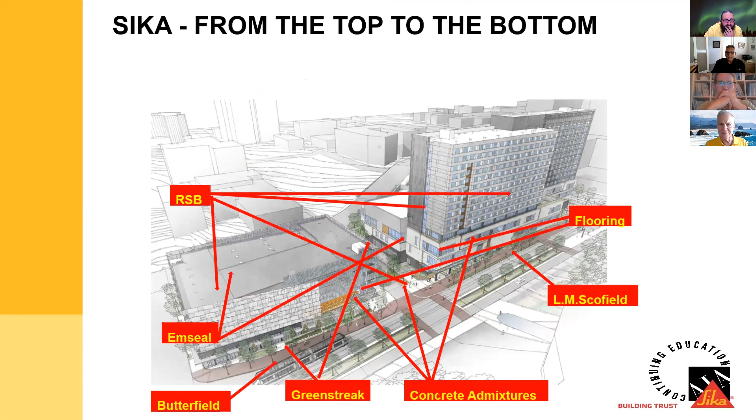In my 5 minutes, I want to give a brief introduction of Sika. We're going to talk about all the different divisions and how to find the correct local rep, introduce you to our Pacific Northwest reps for my district. I want to highlight quickly 4 products and then talk about the Sika Knowledge Center and some continuing education credits. So what do you know about Sika? Most people say our sealants, some people say our repair mortars, but I'm going to go through this very fast - these are just the companies we have in our construction division. RSB is the division I work for.

RSB is the commercial refurbishment, sealing, and bonding division. We have your structural strengthening FRP products, your deck coatings, your sealants, your repair mortars, your modified mortars, polymer modified, and products of that nature.

Locally here in my district, it's Oregon, Washington, Idaho, and Alaska. I have Serge Alexander living in Portland, and you can see his information on the board. He takes care of Oregon and Idaho. In Washington and Alaska, we have Jeff Delplain and Steve Negahbani. Steve is our newest member. He's been with us about a year, a little over a year, and I'm running around trying to make heads or tails of what everybody's doing.

Let's talk a little bit about Sika before we jump into all the products, including 4 new products I want to highlight. If you don't know Sika, we are over 100 years old. We operate in over 100 countries. The RSB division, my division, one of the nice things is where Sika operates in a country, they try to manufacture in that country. At least 99.5% of the products we sell in commercial RSB in the United States are manufactured in Southern California, Northern California, Texas, Ohio, and New Jersey. Sika is an $8 billion company plus, and we have over 26,000 employees worldwide.

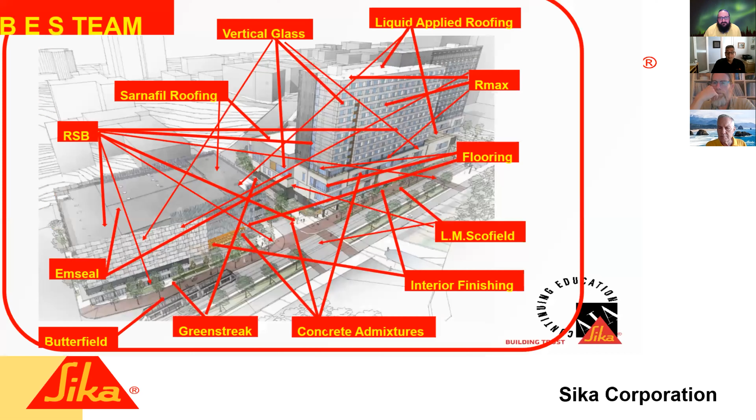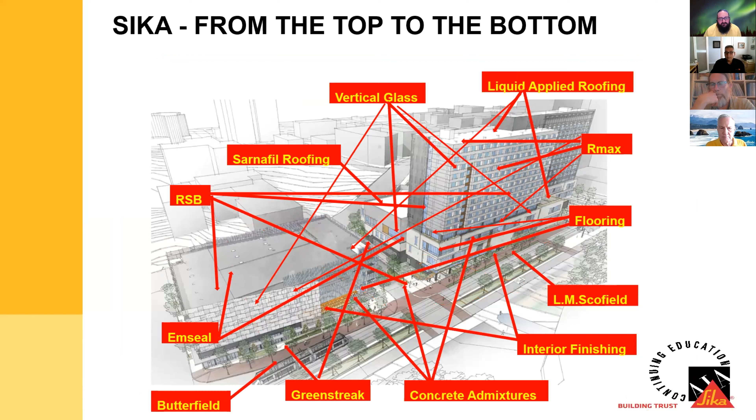Many folks call me and say, you're Sika, I want Sarnafil roofing, which is fine. If you are not sure who your rep is or what division they belong to, feel free to call any one of us and we'll be happy to direct you to the right person if we can't ourselves.

So let's highlight 4 new products. Most of you are familiar with deck coating products and the textured deck coating products. From that technology, we have come up with One Shot. We still have our single component urethane deck coating systems for pedestrian, single component for vehicular, multi-component for pedestrian or vehicular, and our hybrid systems. The hybrid systems would have your urethane base, an epoxy intermediate coat, and then urethane or two urethane top coats.

What we did is we took that technology - when you do the multi-systems, you have to make sure you prime, then the base coat, then the intermediate coat, the top coats, and they all have wait times in between. With this new one-shot technology, everything is mixed in one pail, then it's spread out with a squeegee, back rolled north, south, east, west. You walk away, it's done. You have your base, your top coat, your wear surface, everything.

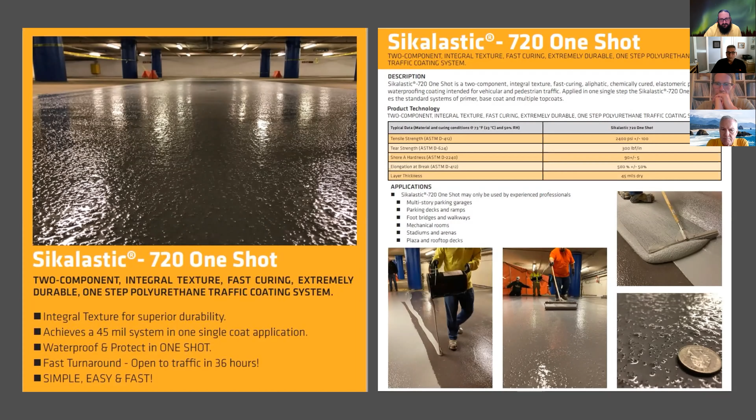The 720 One Shot is for vehicular traffic. The 726 balcony is for pedestrian. The 726 balcony you can actually walk on within 8 hours.

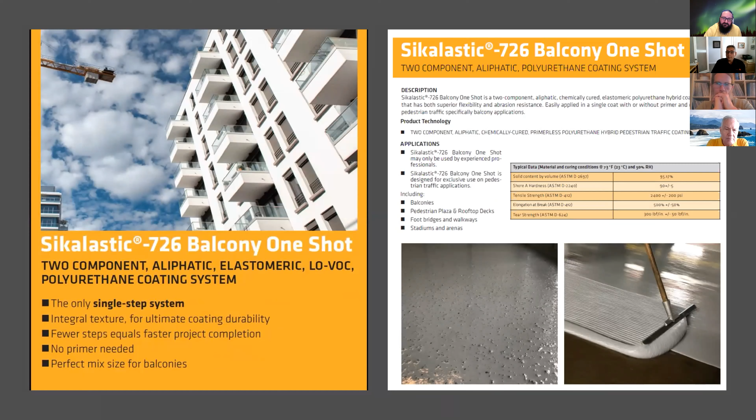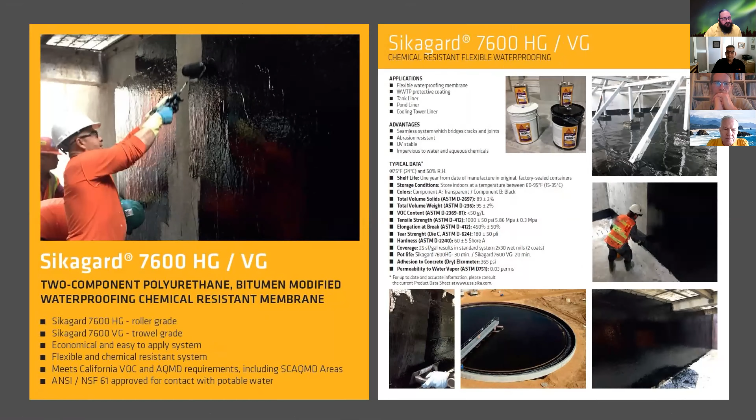The 7600 is our 2-component polyurethane bitumen modified waterproofing membrane. This is great for tank liners, pond liners, cooling towers. Our 360 SCC is our self-consolidating concrete mix. A lot of you know our Sikacrete 211 SCC, a fabulous product - we still sell it, make it. The 360 is new to this year, and it's great because in one lift, you can go to 24 inches, which is pretty amazing.

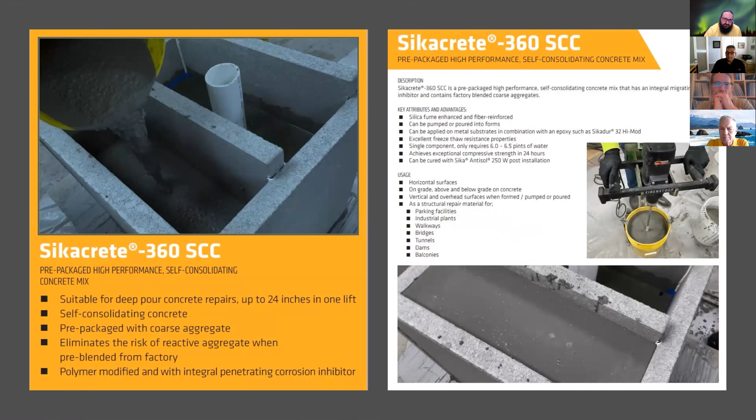That is something you can do at your own pace - you can start a tutorial, leave it, and come back. As I said, it's very hard for me - I say I just busted 5 minutes, so I'll turn it back over to Nate.

Thanks, Frank. Much appreciated. If I can figure out how to turn it back over to Nate. All right, I got it. Okay, thanks. Phil, I saw you were online. Do you want to introduce yourself briefly?

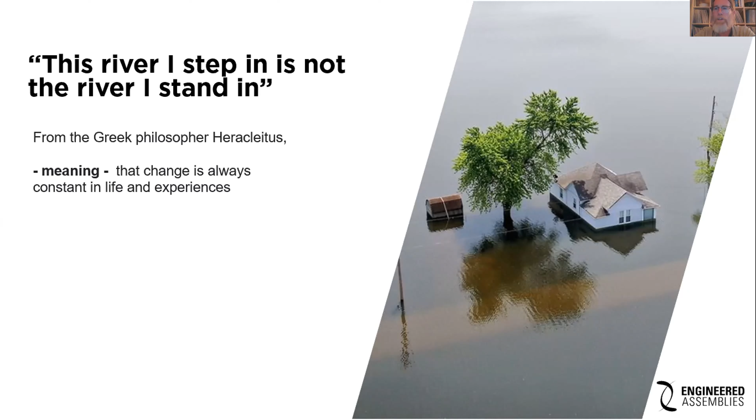They're protecting the building to a great degree, especially when we consider outboard insulated systems are becoming more and more prevalent. So they have a big responsibility, and it's up to us to make sure these things are engineered, designed, and installed correctly. So we've got some weight on our shoulders here.

Ultimately we're going to have to do it with intelligence, because we're not building walls or facades or envelopes out of one yard thick natural stone or two feet thick natural stone anymore. We're in this point of transitioning into lighter weight systems, less mass, less embodied energy. We have to compensate with better engineering, better design.

And these systems we're moving to have incredible potential. They're already delivering, but they could even deliver more. Just like the cars of old, we've got newer vehicles which weigh less, and we've compensated with the brawn of yesteryear with things like crumple zones and airbags. We've made the vehicles resilient through better engineering, better design.

That's no different than facade systems, because ultimately the forces pushing and pulling against facade systems, we're not going to beat them with muscle. We don't beat Mother Nature that way. We have to be involved in a dance of give and take, push and pull. We can do that with clever engineering, good design, and good installation, and come up with a system that can flex when it needs to flex, and not break in the face of environmental adversity, what have you.

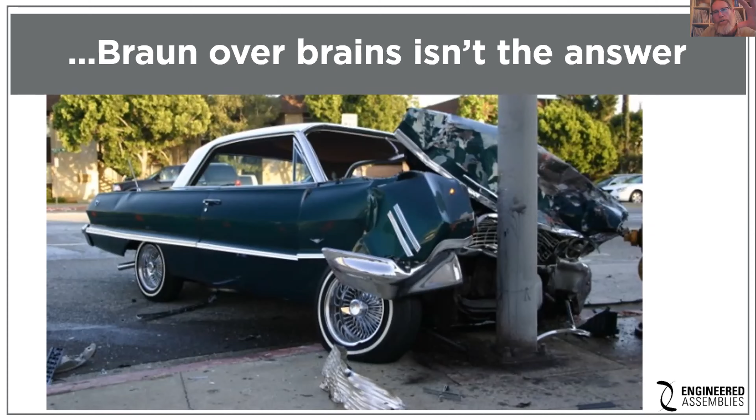So I think this is something to take into consideration. It's important to note that, as I suggested, the environment right now is a substantial dictator. We're designing our facades around materials that are trying to be sensitive to the environment. We also have to be respectful of the environment from a climatic standpoint. So we're using materials with less embodied energy.

Now that's a two-part component. There's initial and recurring embodied energy. Initial, of course, being the energy involved in the fabrication of a material and locating it to site. But then recurring embodied energy is the energy it takes to manage a material, maintain it, and potentially replace it if it doesn't meet expectations in terms of lifespan, longevity.

Well, so that's a challenge, because in many respects, when we're building something lightweight and low mass, the immediate thought is that it's not going to be tough enough, but that's not actually the case. It doesn't have to be that way.

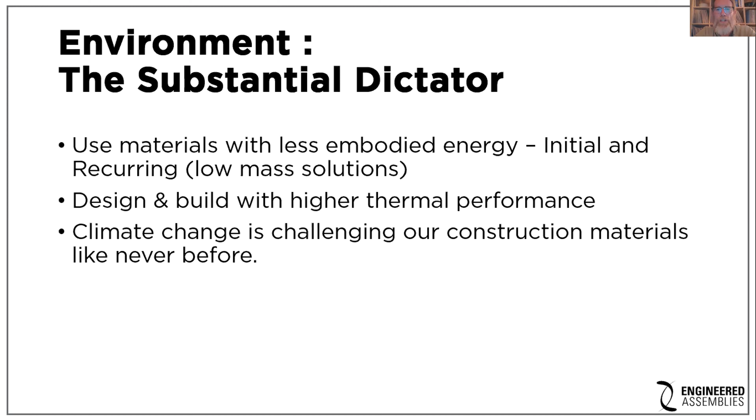We're also having to build with higher thermal performance. And as we've suggested, climate change is challenging our construction materials like never before. But this isn't a restriction. These are only some factors we have to consider to help us navigate our direction as we head toward building good facades for the future.

So within this low embodied energy, we've got the potential of using materials like fiber reinforced cement, high density systems, phenolics, ceramics, porcelains, certain metals, but also we have to consider the systems supporting those, because there's a synergy there. They work hand in hand. The substructure supporting them may be just as important as the materials on the face, the skin. So that all has to be considered, and how those are detailed and installed is critical.

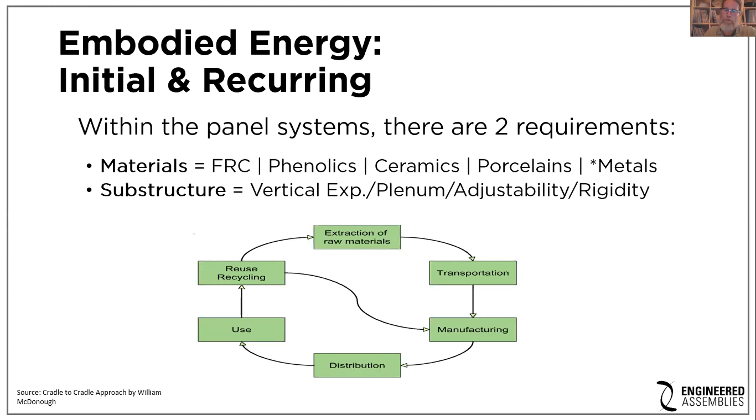So as I say, not limiting, we can use some of these materials to embrace the contemporary design ideals that we have today. And there can be a use of these materials, of course, to address historical content, but also do the cutting edge things, the gritty and daring architecture and construction that we want to do to address our contemporary times.

And so we've got materials designed to take us into the new era that we've been in for a bit and are moving further into. But it can't be done carelessly.

So enter today's subject: 5 most common mistakes. These are not all of the mistakes, but they're the common ones. It's not meant to be finger pointing or a negative presentation, but rather meant to highlight some of the realities that we need to address, some of the things that we can't ignore.

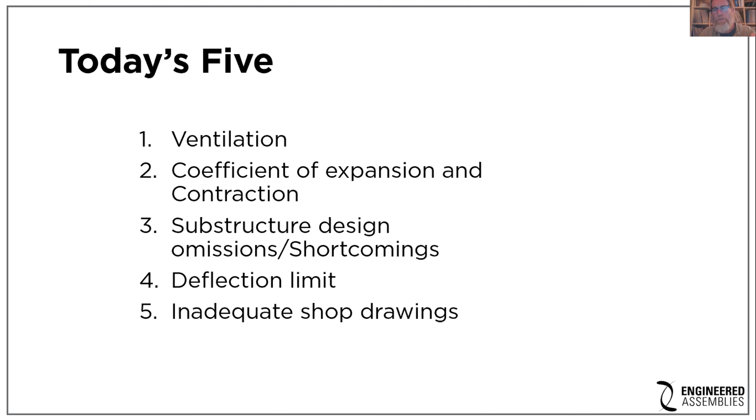And these apply equally from an installation standpoint as from a design or engineering standpoint. So we're going to look at ventilation, coefficient of expansion, contraction, substructure, design omissions, shortcomings, deflection limits, and shop drawings as part of lightweight facade systems. Most specifically, we're looking at Rainscreen systems for all intents and purposes.

A lot of this material is covered in the Engineered Assemblies design guide in terms of proper direction and detailing. This design guide is available for free download off our website. The beautiful thing about it, besides being an incredibly complete, comprehensive guide to detailing outboard insulated, thermally broken Rainscreen systems, is that it's not applicable merely to Engineered Assemblies materials. It's applicable to so many materials in the market, and many of our competitors will refer to our guide as it addresses the science of these systems.

A myriad of materials can fit within this, so I invite you to download a copy. You can always request a hard copy from us too. I prefer those, they're easy to flip through and carry around. With that in mind, I'll be referring to it a couple of times within this presentation, so I invite you to get yourself a copy.

So what type of Rainscreen facade system are we really talking about here? Because when people mention the word Rainscreen, there's probably as many definitions for it as there are for the term free range chicken. So there are a lot of different designs. The version I'll be referring to in this presentation is something we call an RVRS System 2.

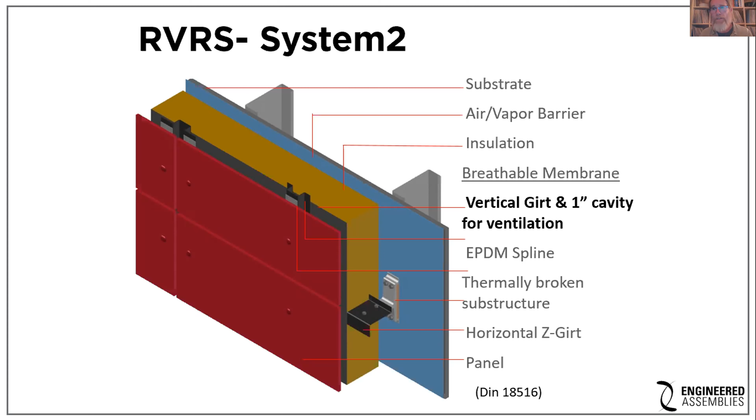Okay, and then behind that, of course, we've got our insulation plane, which sits, as you can see, on a thermally broken substructure. So thermally broken substructure, outboard insulated. We've got a membrane to protect the insulation, something to deflect direct precipitation to flow downwards. But we've got a vertical unobstructed plenum, and then we've got a panel in front of that. This is an RVRS System 2, okay? This is what we consider a very good high performance, relevant Rainscreen system for today.

But ventilation - I don't know if you can have too much ventilation within a facade system, within an envelope on a facade. Because certainly, as you probably experience in the Northwest, precipitation, moisture can be abundant, and you need to find a way to manage that. We get our share of moisture in the east, certainly on the east coast of Canada, but wherever you are, there's going to be a necessity for ventilation because it's not just managing moisture.

So we've got an uninterrupted vertical plenum. It's open at the bottom, in this particular case, and these things vary per region from a code standpoint. We can go 6 stories in Ontario with an uninterrupted plenum, okay? In some regions, because that plenum could be treated as a fire chase, you'll need to have a through wall flashing. But for the sake of this particular slide, we were going 6 stories. It's open at the bottom, it's open at the top. Air comes in at the bottom, goes up, comes out the top and exhausts. We've got this continuous flow, okay?

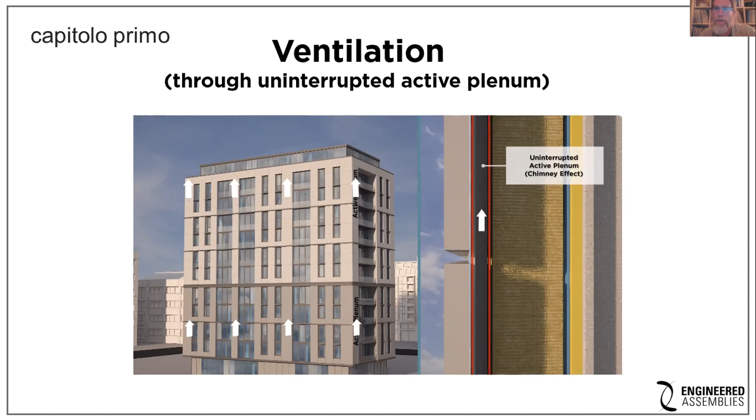Okay, it's constantly working, always working. So this is an important component, and this must be addressed from a detail standpoint, designed correctly, and it has to be installed correctly. It can't be interrupted. There's a microclimate in this plenum, and this plenum, I should suggest, is 1 inch deep. I should have mentioned that earlier, I apologize. It's a 1 inch deep plenum. So the climate in this little plenum is not the climate on the outboard side of the panel. It's not the climate on the inboard side where the insulation is. It's its own separate little microclimate.

Okay, and it does help to defer - if there's an abundant amount of solar heat gain coming down on the panel, it will exhaust some of that heat and relieve the panel of that strain, from that heat energy. There are very few materials that benefit from excessive heat. And so it's going to help defer some of that and exhaust that heat.

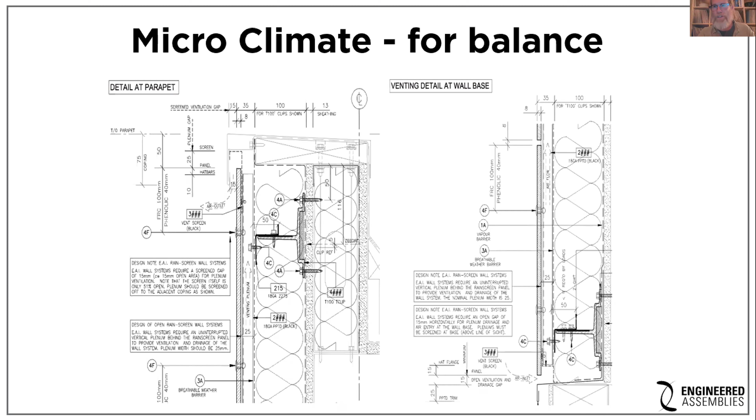Ventilation, a big component of DIN standard 18516, and a big component of Engineered Assemblies RVRS System 2.

Some common mistakes: flashings sometimes get installed on a parapet by the roofing trade, which isn't doing the facade and isn't sensitive to the detailing. In this particular application, this is a louver assembly for ventilation into a building, or it could be a window.

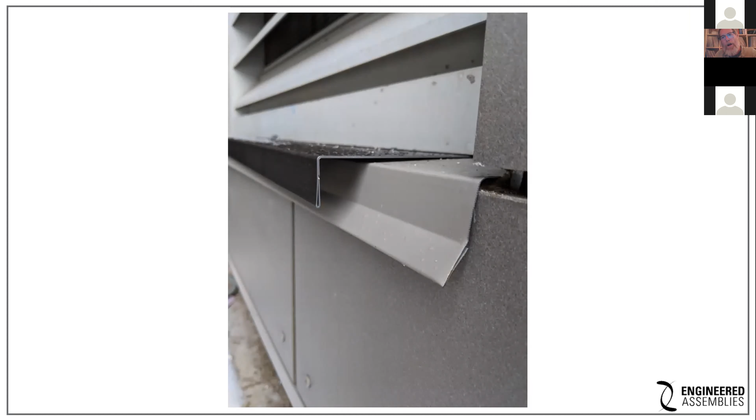We have to ensure these flashings are set up so that this plenum can exhaust correctly, and perhaps on the bottom that it can serve as a proper intake for ventilation.

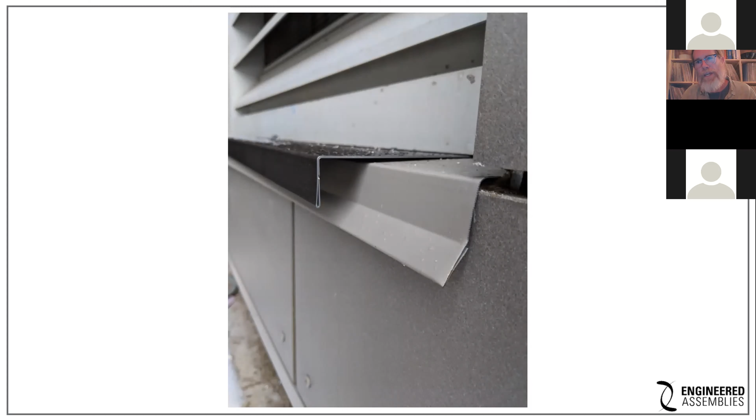All these details and dimensions are laid out in the Engineered Assemblies design guide, in metrics, showing how many millimeters of space should be allowed for proper ventilation. It's all set up for a 1 inch plenum, a 1 inch cavity, which is an adequate amount of ventilation for most materials.

So this thing is open at the bottom and the top for air, but we generally engage 50% perforated screens, and that eliminates critters from making a home within our plenum.

Birds and bats are the primary concern. Most insects aren't that interested in being in a plenum because of its active nature, it's straight up, not good for mating. Wasps in particular aren't interested in being in a plenum either, since the gusts of air moving through are not conducive to their lifestyle.

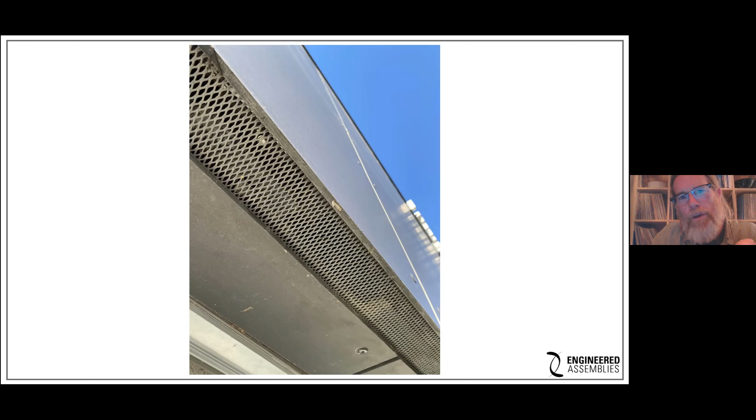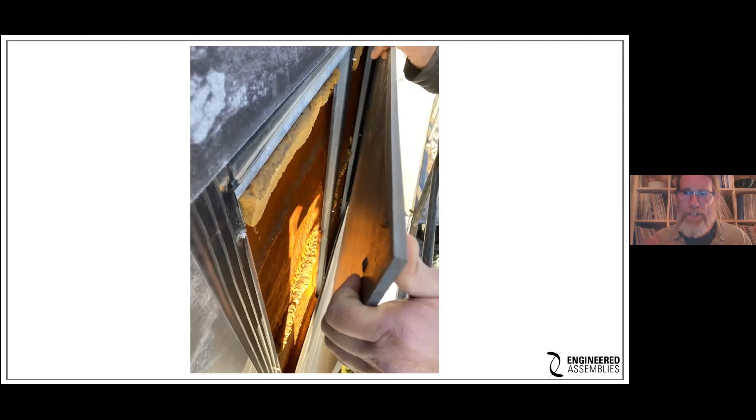This is the kind of stuff we're talking about. But when we look at installations where spray foam is engaged, and the installers didn't respect the limits of the spray foam, it ends up expanding and blocking off the plenum. Then we have a problem: we don't get proper ventilation, it can affect the panel negatively, and it can affect the breathability of the insulation cavity. Everything suffers because moisture is allowed to collect.

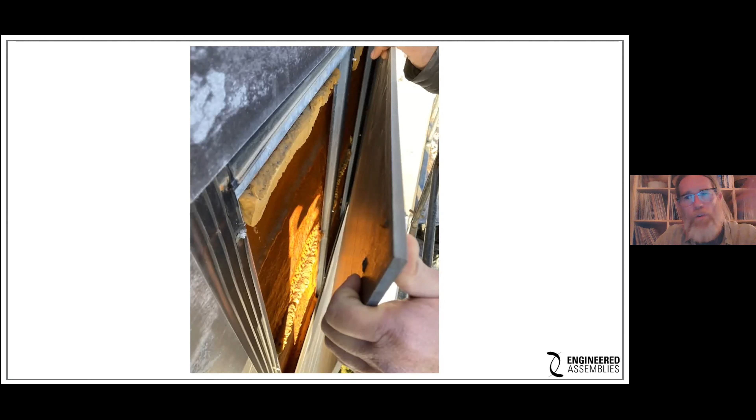These are issues associated with ventilation. We talked about the benefits of ventilation and how it works for the integrity of the panel, the insulation component, and offering a balance in terms of temperature deltas. There's a necessary amount of energy that should be employed to make sure this is managed correctly.

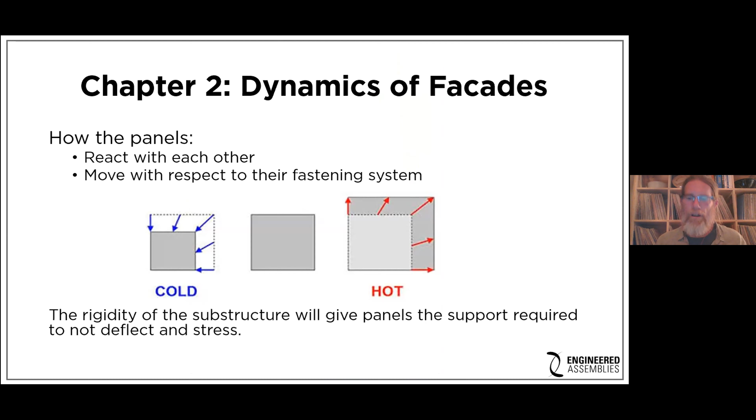Chapter 2: dynamics of facades, how panels react with one another and their fastening system, hot and cold, expansion and contraction of materials. This is an important component.

Oftentimes when we see failures of facade skin systems, whether warping of panels, tacoing of panels, cracking of panels, or shearing of fasteners, it's because allowances for expansion and contraction were not managed properly. Particularly with lightweight rear ventilated Rainscreen systems, lightweight, low mass materials are typically more prone to expansion and contraction than high weight, high mass materials. So we have to address that.

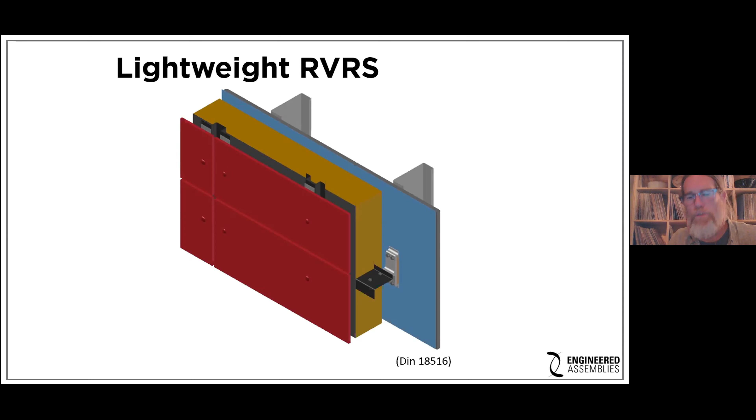It doesn't make them more difficult. We have the intelligence to work around this kind of stuff, and we've been doing it for a while now. We just need to make sure we're paying attention to these types of realities.

For example, when panels, let's take reinforced high density fiber cement, you're going to have a face fasten system, using a rivet system to fasten those panels. Well, all the holes on a panel for all the fasteners need to be over drilled. There needs to be float. We'll refer to them as stop and go points. There's going to be 1 or 2 fasteners on a given panel, let's say that panel is 4 by 6 feet, where the fasteners are not going to have float.

But all the other fasteners on the panel are going to have a few millimeters of float between the fastener and the holes that are drilled. Our fixed points hold the panel supported in place, and they can handle the shear, no two ways about it. But the rest of the fasteners are going to have float. This applies to phenolic panels, aluminum composite systems, et cetera, which everything expands and contracts. There needs to be fixed and floating points.

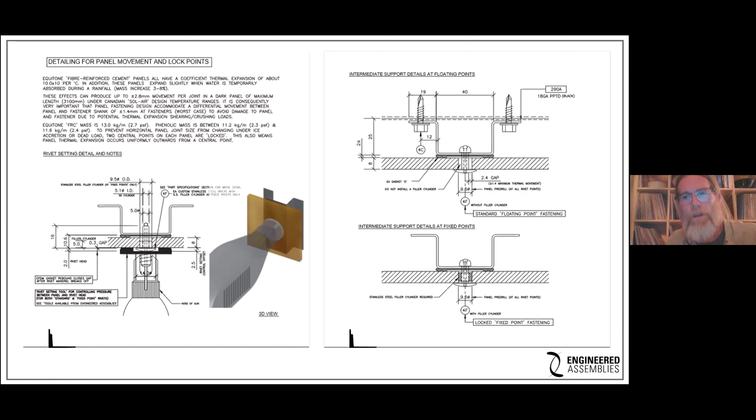It's also important to consider that it's not just the panels that are expanding and contracting, it's not just the skin, it's also the substructure behind it. The substructure is going to move, the panels are going to move. Buildings are alive, buildings are dynamic. Things are moving, we need to account for that, and it's a mistake not to.

So in the spirit of this presentation, 5 most common mistakes, yes, we need to account for expansion, contraction, and movement, especially with the swings of temperature we've seen. In the Northwest you certainly get some crazy swings of temperature, just as we do in the East, and potentially over and above the freeze-thaw line, which is very detrimental to a lot of materials. We've seen some crazy swings here.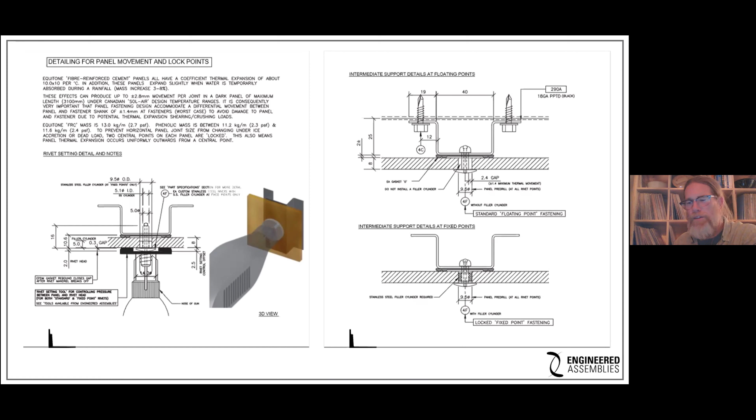And it's systems like this which help save skins and what have you. Now, we had a project actually in Whitehorse up in the Yukon, near Alaska, where we had a terrible failure within a project, and that was specifically because every single point of the panel system was created as a fixed point, and they get a lot of earthquakes up there.

They can be very small, but I think the number was something like 265 earthquakes per year. It's almost one every, well, it's 2/3 of your days, there's a small earthquake to some degree. Amazingly enough, when a lot of this technology is employed, it can manage a lot of low tremor, low Richter scale earthquakes simply through the float that's put in within the systems, within the substructures, within the panels.

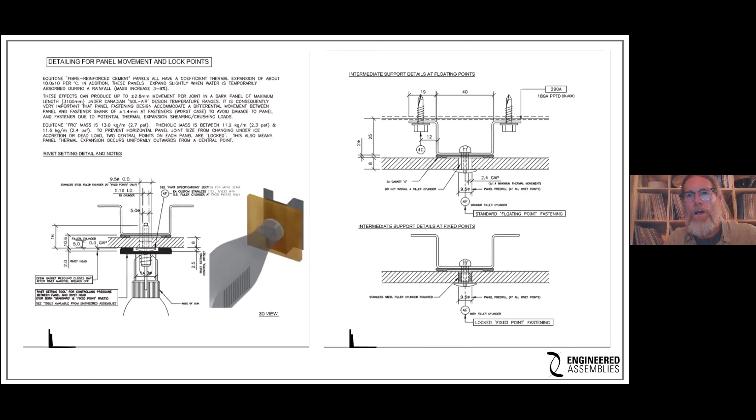So that's a bit of an extreme example, but certainly for the rest of us, and I know in the Northwest there's a sensitivity to tremors and what have you, it's something to consider. But as I was suggesting before, a typical panel layout would have a couple of fixed points and then all the rest would be floaters. And as you can see directly behind the panel, we've got our vertical bars for our unobstructed vertical plenum.

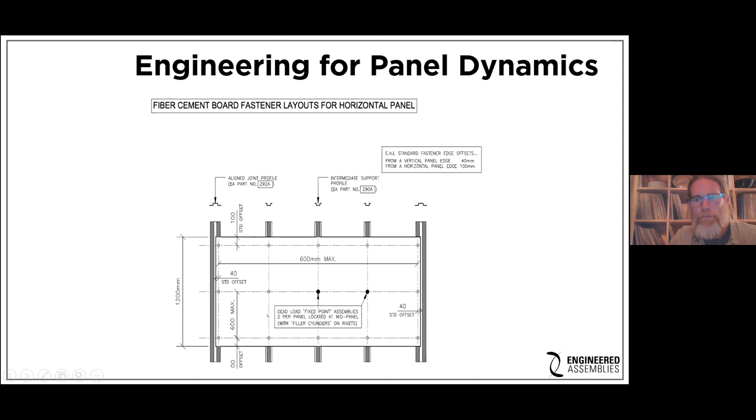This is an example looking at a panel system where a fastener, a rivet, is not centered within the float, within the hole, the overdrill. So if our rivet shank, let's say, is 3/16 and our hole drilled is 3/8, we've got a decent amount of float there, but it doesn't serve us if the fastener is hugging one side of the hole, and that creates just another fixed point. That's all that is, and that just equates to stress.

So we've got specific tools, and there's tools that are common in the industry, centering tools to make sure fasteners go in properly. Now, as I say, this presentation does deal with some fairly technical ideas that may in some respects be minutia, but this is the difference between facade systems lasting their 50 years, their 60 years expected lifespan, or lasting 3 years.

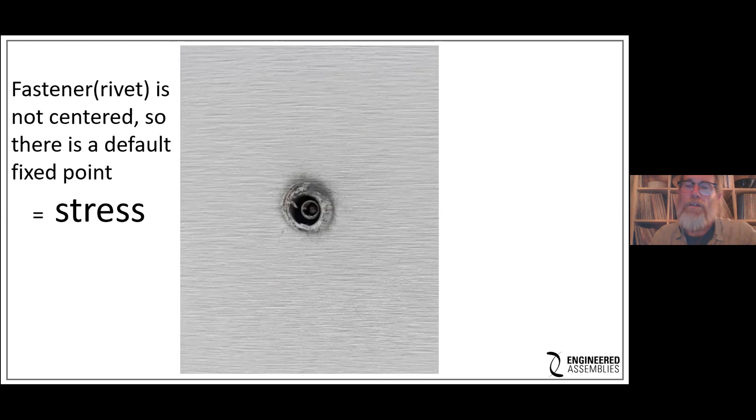What we want to do is make sure that systems are specified correctly, standards of performance are clearly outlined, and that warranty requirements are met. This is very important. A building facade needs to be done at an execution level that serves all the materials in question as best as possible, and sometimes this extends even beyond manufacturers' simple instructions. We need to go into some more advanced systems, particularly when some of these materials are coming from Europe, which in a lot of cases do not enjoy the climatic conditions that we experience here in North America.

So with that in mind, say this is the second component. Say we've got ventilation and then coefficient of expansion and contraction of specific panels that needs to be embraced. So why don't we take a moment here and see if there's any questions that need to be addressed. Nathan, did we get any questions in the question and answer? We did not get any questions. Okay, but if anybody wants to jump in, please do.

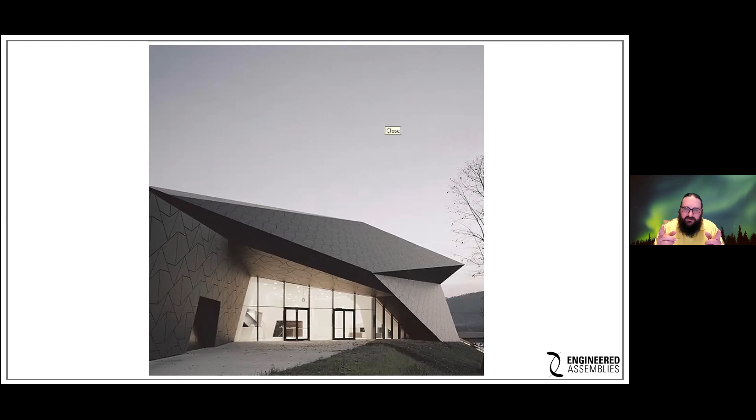Where it's 2 points, it's always the 2 adjacent. Yes, they're always side by side.

And then there's some rules in terms of, if they're employed vertically, they're not to be on the same vertical channel. All of this criteria is laid out within our design guide. It's very, very clear. We have a bunch of rules, and I think I've got some slides that may even show that. So we'll keep hopping along here, and as questions arise, let's knock them out of the park. Thanks for the question, Ken.

Okay, so substructure design, omissions and design omissions and installation. So again, this is talking about the dynamics of buildings, substructure and superstructure.

Where we're looking at vertical expansion contraction of substructure, if we're employing some vertical members behind the panel to support the panel, and let's say for this presentation we're talking about omega channels, which some people refer to as hat bars. If we've got those and we're dealing on a multiple story building, then we're going to have a number of those hat bars moving up the building supporting the panels.

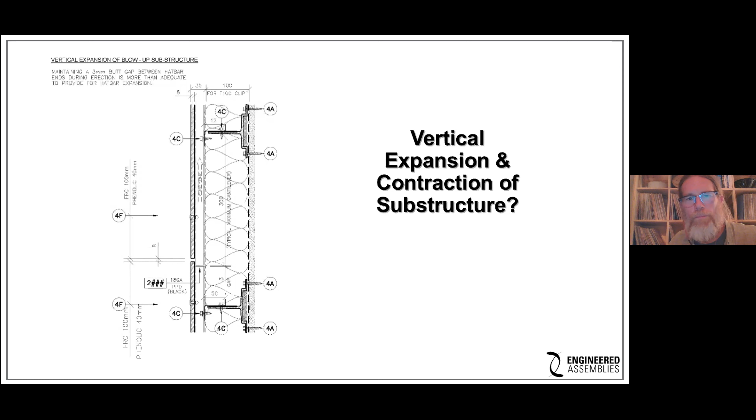And when we're looking at this, vertical hat bars have to stop and start at traditional points of deflection. So let's say for this example, we're looking at steel stud and concrete slab construction. With that, we're going to have a natural deflection point at the concrete slab. We reasonably cannot have a substructure, a lightweight substructure for that matter, crossing over that point of deflection.

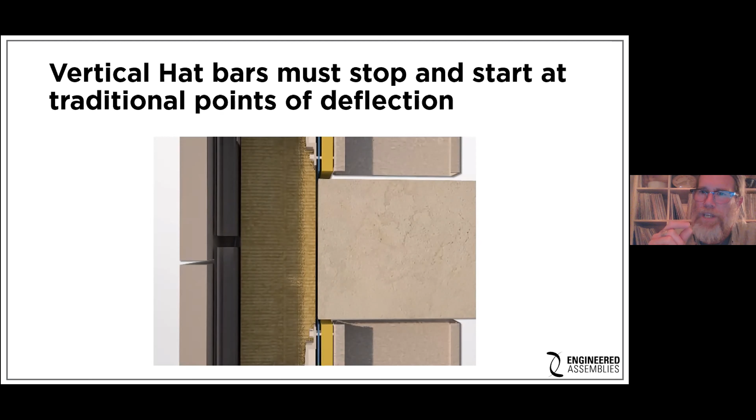It has to stop and start there, okay, because there's going to be movement. And if it's going to stop and start, we have to have a reasonable gap. And we also have another rule: we cannot have a panel, no matter what material it is, jumping over the gap of a substructure and fastening to two sequential members. Because if those members either push together or pull apart, what's it going to do to the panel? It's going to try to push and pull or tear the panel apart.

So we've got these extra systems in place. We've got the fixed and floating points of the fasteners. We ensure that at traditional points of deflection in a building, we stop and start our substructure.

If we're looking at concrete slab, steel stud construction, it's reasonable to assume that when people are doing takeoffs and putting material together to erect a substructure, all their vertical hat bars or vertical omega channels are going to be the size of the floor to floor or slab to slab dimension. It's very simple—they get ordered to a custom length, but I shouldn't even use the word custom because that seems to denote a higher price. The fact is they're always cut to the size people need, just like studs are, and they're ordered to suit the building. So those members go from slab to slab.

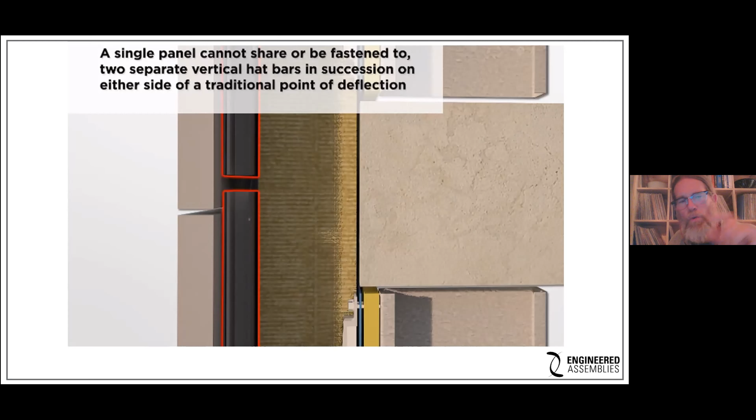And when panel layout is being done, from a design standpoint at the architect's end, they have to ensure that there's going to be a stop and start point of panels at traditional points of deflection, because we know our substructure is going to stop and start there as well. So what we can't have—and this is a mistake—is 25-foot long hat bars extending up a building, going way past our traditional deflection points, our slabs.

And we certainly can't have them, as we can see on the left here, where they simply stitched the hat bars together, put one over top of the other, and fired some fasteners through them.

What they're creating here is a lightweight, light gauge net around the building, expected to contain the movement that this superstructure is going to experience. It's ridiculous, it's going to pull this net apart. And when this light gauge net starts to get pulled in various directions, what's going to happen? Our panel system is going to suffer.

It's going to crack, it's going to taco, what have you. So these are mistakes that happen from a design standpoint at the shop drawing stage, or they happen at an installation stage on site where someone makes a decision to just ignore that traditional point of deflection.

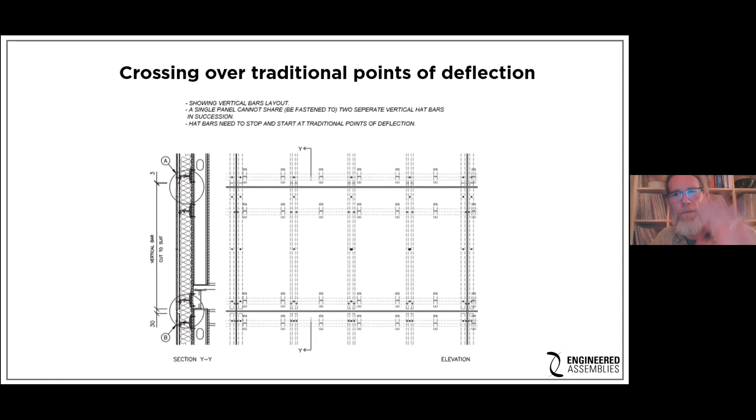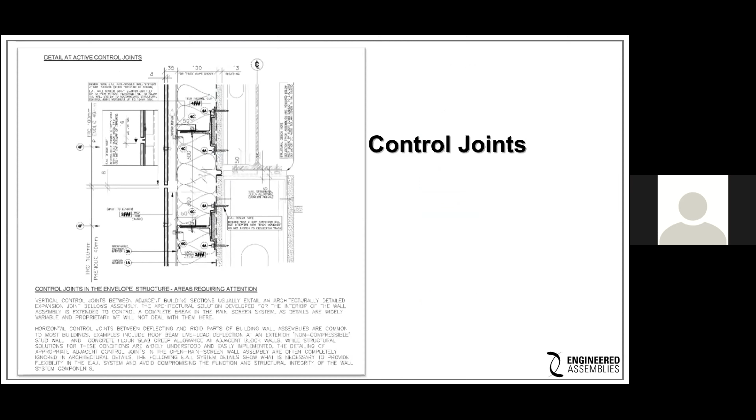Jeff, we did get one more comment. Said the IBC only allows 10 feet of vertical plenum. So you had talked about the possibility of needing fire stopping and things like that. Does that change the approach?

We would probably just need to have a through wall flashing, or it wouldn't necessarily need to be through wall. It really just needs to cut the plenum off. We would still have our intake and our exhaust, even though we've got a flashing going through. So if 10 feet is the extent of a 1-inch plenum, then it's very conservative, but if that's the case, you would have a flashing go through and stop and start that plenum.

Now, amazingly enough, I was in conversation with an American outfit who was talking about an intumescent membrane that could be used. We're looking at this as well. So what would happen is that in the case of a fire, the membrane would act like an intumescent material would, and it would swell and block off the plenum. So as soon as fire reached the membrane, it would cut off the plenum, and that circulation wouldn't happen.

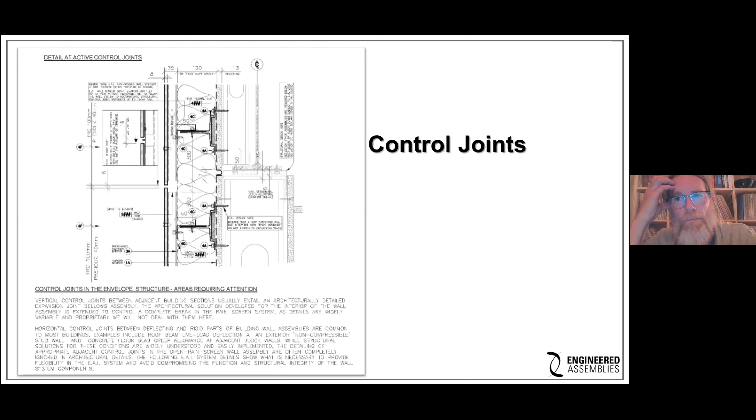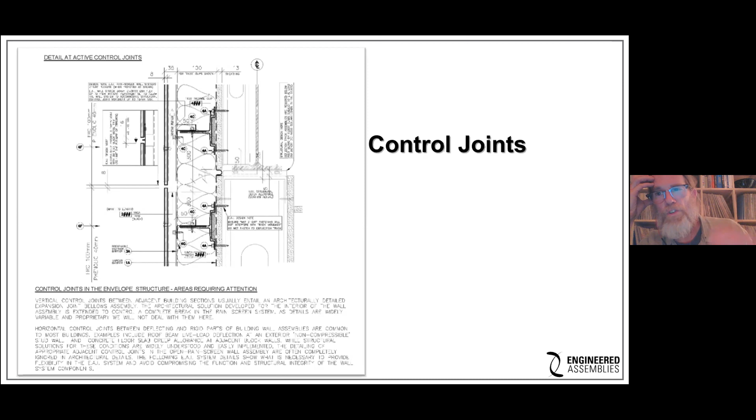So that's something I would look into. I can't recall the name of the particular material right now, but it was a US outfit that had this type of intumescent membrane. That's something to consider, especially when you're looking at something as low in depth as an inch. But otherwise, our response in Ontario, Canada, where we're restricted to 18 meters, or about 6 stories, is we have a through wall flashing. That's what generally occurs.

Does that answer people's questions? I believe so. Okay.

Okay, so control joints. Actually, I think I'm going to make an adjustment. I think my screen just went a little dim. Is my screen well enough lit for people, or is it a little on the dim side? I think it looks okay here.

What do we got? Comment says it looks okay. All right, well, with that in mind, so ultimately, one last point about this: control joints.

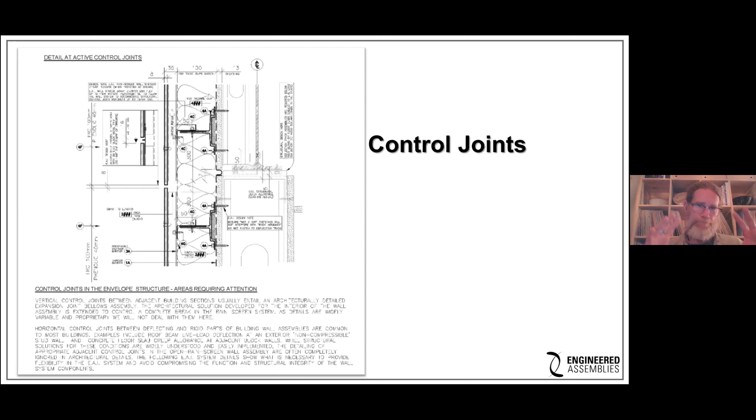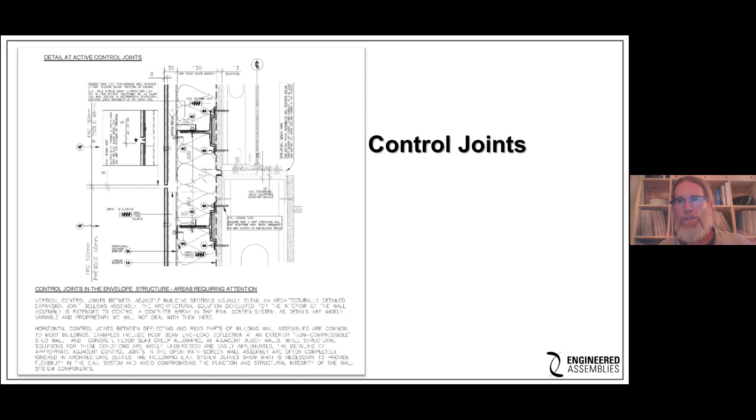This is all part and parcel of the Engineered Assemblies design guide. We address control joints within buildings, how to detail them accordingly for this type of system, rear ventilated rainscreen with thermally broken substructures, etc. I can't say enough about the design guide. We've put a lot of resources into it, a lot of thought and engineering. It's simple enough, but comprehensive at the same time, with a lot of information, and we're always open to questions and challenges to address unique circumstances. So certainly get in touch with us.

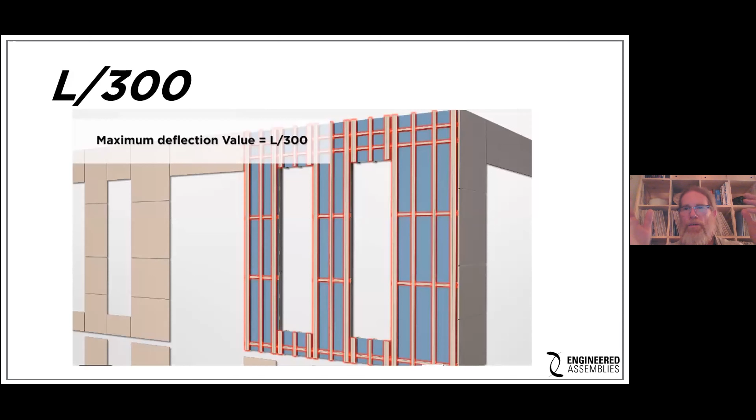So moving along to our presentation here, as we're coming up on the hour, chapter 4: poor deflection limit of substructure. This is a mistake that gets made where it can cost the success of some facade systems. With that in mind, we call for L over 300 for maximum deflection value for substructures. This is a simple enough deflection value to obtain.

It's very easily obtained with 18 gauge substructure components, and 18 gauge offers great pullout. So the cost differential between 20 and 18 gauge is nominal.

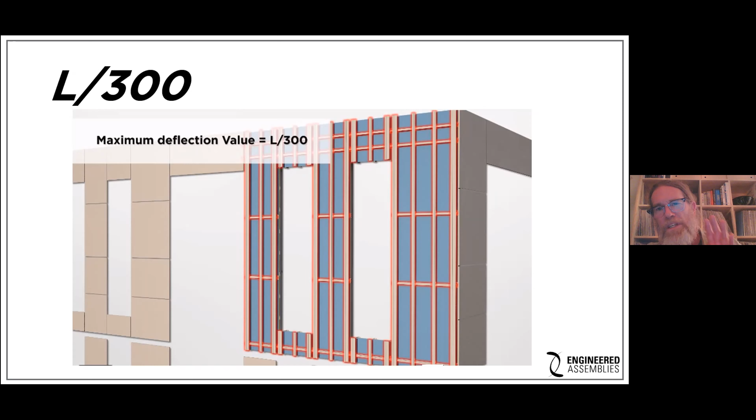This ensures that we're not getting a deflection amount that panels can or cannot manage. A lot of metal systems, for example, might be able to manage a much higher amount of deflection, but when you get into high density fiber cement systems, glass fiber reinforced concretes, or phenolics, they want things to be stable. They want substructures, especially in through-the-plane flexibility, to be as stable as possible.

Part of how we achieve that is by using, as I referred to earlier, hat bars or omega channels. Z bars do not enjoy the same strength and the same potential for deflection limits as hat bars do.

So certainly I recommend that people go the hat bar route, the omega channel route. People are able to create them in a variety of depths and face widths to accommodate a variety of panels. I think you'll find that when you get into our design guide, you'll see...

...quite an array of different hat bars that get employed for different conditions: external corners, interior corners, and the like. So this is something that we consider very important. It's a small factor, but a deflection limit of L over 300 lends itself significantly to the success of lightweight, low mass, rear ventilated rainscreen facade systems.

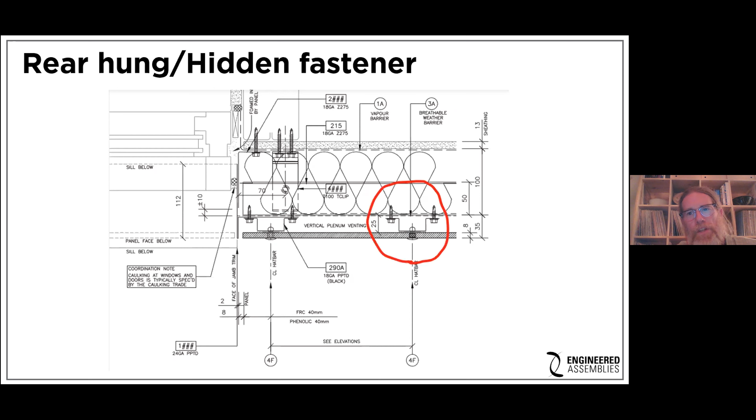Now, all of what we've been speaking about here, it's amazing how we need to talk about this stuff nowadays, because in some respects, people have a lot of balls in the air from a design standpoint or from an installation standpoint. We either don't have the knowledge or the care that we need to have to do this.

There was a time when architects could design something and make good on drawings, and that was enough because everybody understood what was trying to be achieved, and everybody understood the right way to do things, the proper way, the quality way to do things.

So when we talk about due diligence, as far as a construction contract is concerned, it's placing an obligation on the contractor to complete the works with care and requisite effort. And when we look at that, requisite means a thing that is necessary for the achievement of a specific end, and that specific end is quality construction.

This whole presentation and the article I wrote for Construction Canada back in June 2020, this all arose out of a discussion around these terms: that if we understand the materials we're working with properly, and that understanding is out there, it's science, and we have a handle on it...

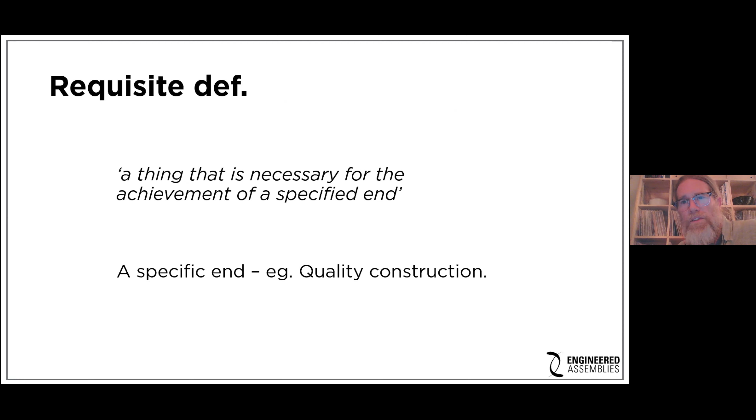...and with proper training and proper execution of installation, we have worked with these materials successfully. We can continue to do it, but we have to keep our foot on the gas about this. Failure to provide this type of quality is going to result in failures, and we can't permit that because it's so easily avoided.

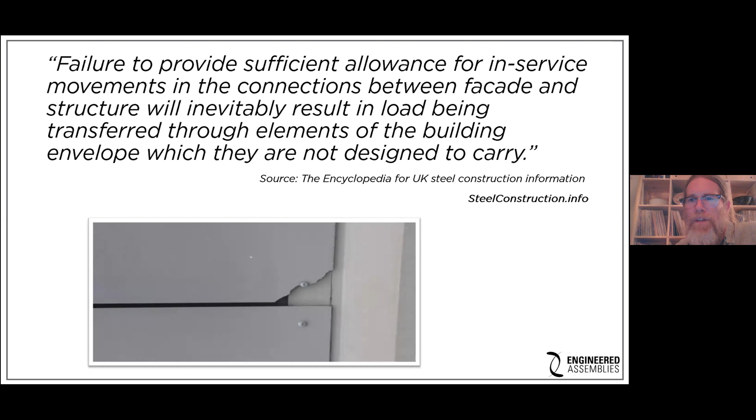So in the interest of having our facades address the needs of our built environment for the future, we need to make sure that people are not making mistakes, such as the mistakes we're talking about today.

To wrap up this presentation, shop drawings is the last chapter. It's a good topic, because everyone here has probably seen good shop drawings and really poor shop drawings. Good shop drawings are really just good instructions. When one has a really good set of shop drawings, anybody who understands their trade can open them up and have a clear understanding of what is required and where it goes.

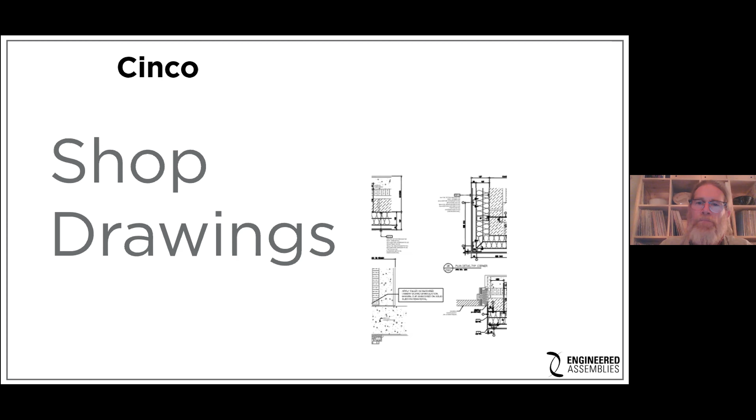So that's a very basic, fundamental explanation of the necessity for good shop drawings. When I've been called to site to inspect a failure, I've sometimes been amazed at how poor the shop drawings were, and it doesn't amaze me at all why these failures occurred, because the shop drawings were so poor. Good shop drawings should start with a system drawing.

The system drawing should be a full-page explanation of all the fundamentals of the system being employed, in this case a facade. There should be good liner notes explaining every single item that's going to be employed within this system, so no rock should be left unturned.

Good principles, like having gaps between sequential vertical hat bars and not having panels jumping over top, are all laid out within the system drawing. If the system is sophisticated enough, it might require two pages of system drawings, but it can usually be done in one. This is what I call a good set of shop drawings - it's the truth.

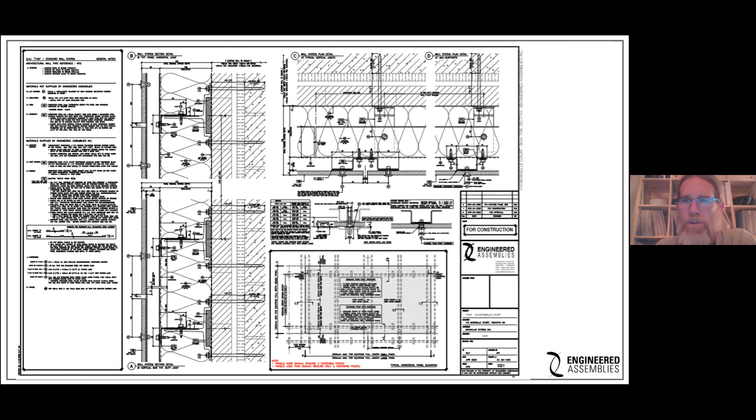So people can look at this, read through it, and understand. And if they have questions, they can call someone like ourselves, or whoever is behind the system, and be walked through it so everybody can understand.

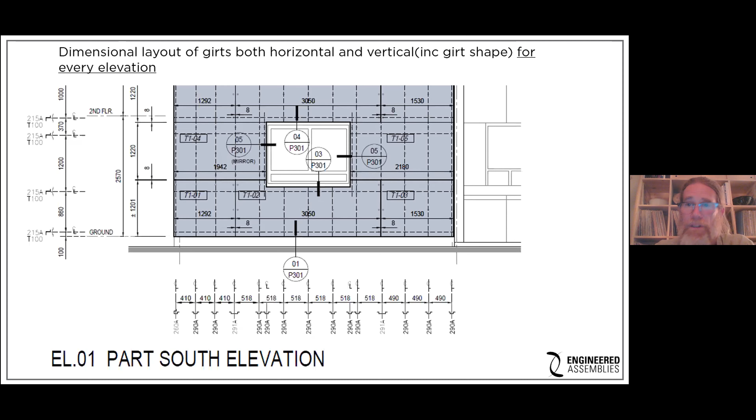In a good set of shop drawings, there'll be pages showing every single elevation of the building. On every elevation, it'll show the layout of every panel, every module size, and where every item of the substructure is placed. That goes for the horizontal members within the installation plane, and the vertical members that sit directly behind the panel. All of those members of the substructure and the panel layout will be clearly spelled out in those elevation pages.

Now, I'm not going to mince words - good shop drawings are expensive. They cost money, but they're a fraction of the dollar amount of a complete facade installation, material and labor. And they can be the difference between a system failing or succeeding.

When facades fail, they often fail after the labor warranty has diminished - usually 2-3 years down the road, or maybe 5-6 years, in the face of a 10-year or 15-year facade warranty. So the cost of good shop drawings is completely legitimized, and it should be a necessity to have excellent shop drawings.

It's like driving - there's no room for average drivers on our roads anymore with too many people. Everybody needs to be a great driver, and that's a personal thing of mine. But we need to have great shop drawings on every project. Shop drawings need to be great.

It also helps us down the road understand when something needs to be amended. We can get our hands on the shop drawings and understand completely how the system went together and why. So every single detail of every unique condition, and non-unique condition, of a building will be outlined as well in these shops.

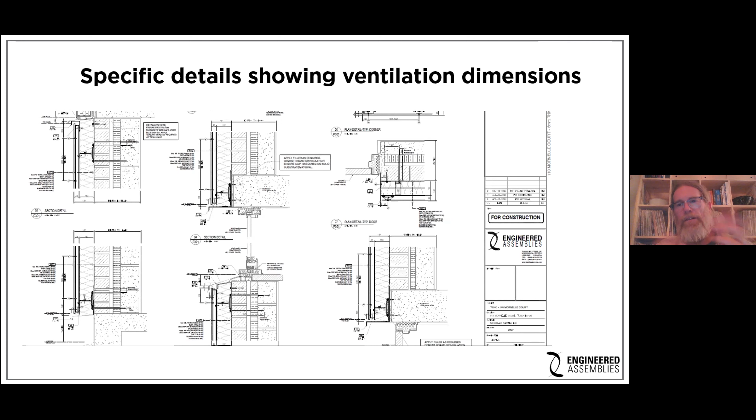So we're going to have a system drawing to explain what's going on here. We're going to have elevations outlining the placement of panels and substructure members. And then we're going to have details showing specifically how every condition on a building is addressed with respect to the facade. With that in mind, we'll look at the 7 factors for future ready facades.

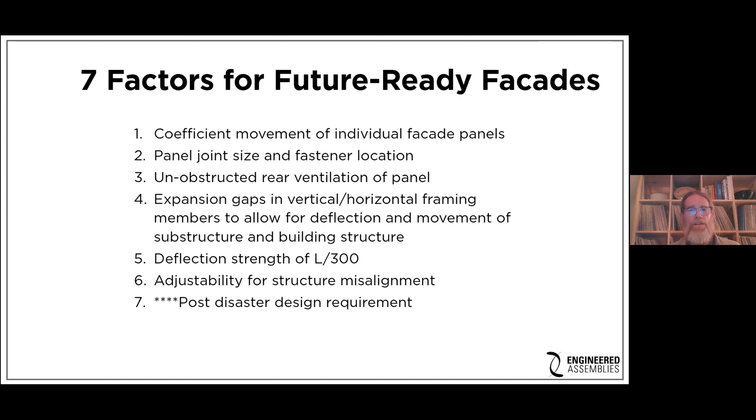So those are the 7 factors. This is something that we address in the beginning of our design guide, and we address these components within the rest of the guide in the following pages.

Engineered Assemblies has devised a certification series. I don't know if we're going to have time tonight to go into this - it's a unique certification series that we're offering. It's being offered right now in Canada, so I don't know how it lends itself to the US yet. It could lend itself very well, I think, but it's essentially a pathway to compliance to make sure that things are met properly vis-a-vis manufacturers' warranties in terms of installation of materials, and that facade systems are installed correctly.

But let's take a moment now and just revisit what we've talked about tonight here - the 5 big points, the 5 mistakes and the 5 issues that need to be addressed, that being ventilation, coefficients of expansion and contraction, proper substructure design, deflection limits, and the issue of shop drawings. These issues are critical to the success of lightweight facade systems in our rear ventilated Rainscreen application.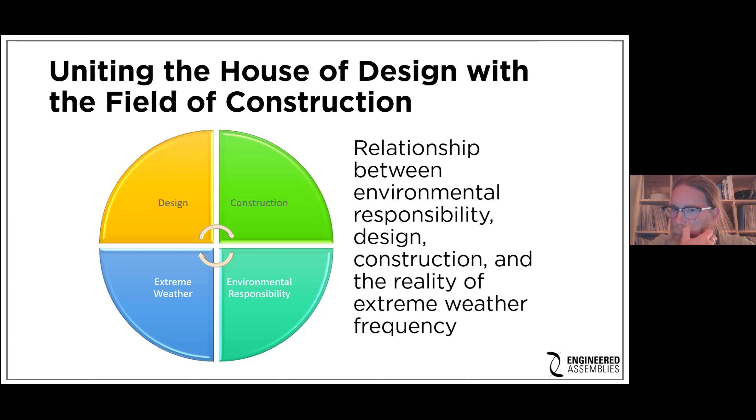Uniting the house of design with the field of construction definitely will help bridge a lot of this - the ability to convey these items to all parties involved that are part of the success of a project. But we need to embrace the relationship between environmental responsibility, design, construction, and the reality of extreme weather frequency.

So with that in mind, I thank you for giving me the opportunity to speak to you tonight about these sensitive issues, and invite you to pick up a copy of our design guide and see how it lends itself to the architecture and construction that you practice in your respective areas. I think it will be relevant.